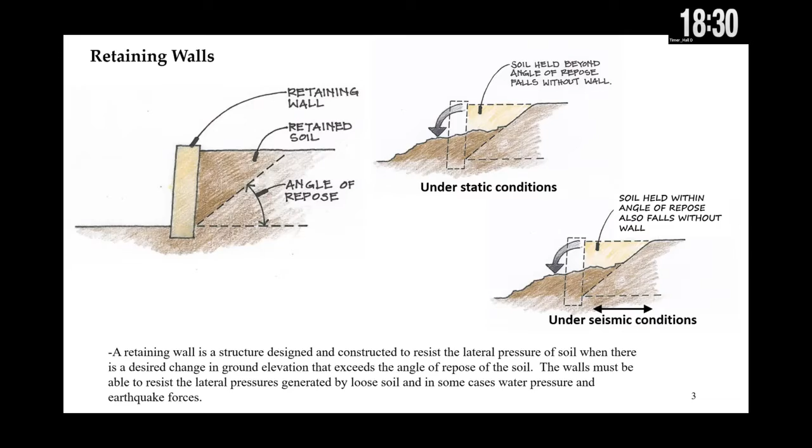Now, coming to the static forces acting on a retaining wall, I'll show you a very simple example of a retaining wall with different kinds of forces acting on it. One of the major forces is soil pressure. The soil being retained by the wall tries to push the facing of the wall, and because of that you have lateral earth pressure acting.

Typically, as per Rankine's theory, we assume the distribution of this pressure to be triangular. If you want to find the resultant force acting on the wall due to soil pressure, you take the area of this triangle, half of base into height, and it acts at a height of h/3 from the base. If you have some surcharge acting on the retaining wall, the resultant will be a rectangular distribution with a magnitude equal to the coefficient of earth pressure into the amount of uniform surcharge pressure.

This is equal at all elevations, and the area of this rectangle gives you the resultant thrust due to the surcharge pressure. And if you have live loads acting on the retaining wall, then you need to assume the Boussinesq theory.

Westergaard's stress distribution theories are there. We derive the earth pressure distributions below the live loads, and we compute the resultant thrust due to these live loads. Then you calculate the total pressure as a combination of all these pressures.

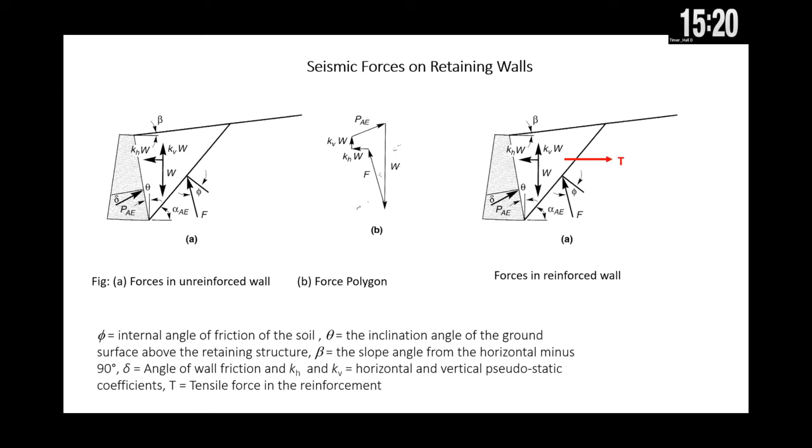You should find a mechanism by which you need to hold this wall back. This is possible if you can include some tensile elements into the retaining wall in the form of reinforcement. If you have layers of reinforcement embedded into the backfill, you can compute the total tensile force, which will actually try to push the retaining wall back into its original position. So this is where reinforcement comes into picture for the seismic stability of a retaining wall.

Now, how does an earthquake force act? Earthquake force is actually an inertial force. Since any structure is usually under stable equilibrium, and then you have this earthquake force coming and shaking it at the ground level, the structure will have its own rigidity or inertia to oppose this movement. Because of this, the components of the structure are subjected to different levels of displacement. This is what we call the inertial force effect.

Now, to encounter or sustain this inertial force due to earthquake, the structure has to be as flexible as possible. If the structure is extremely rigid, it will undergo enormous amounts of displacement, whereas if it is a flexible structure, the displacements will be limited, and the structure will have the flexibility to sustain the deformations.

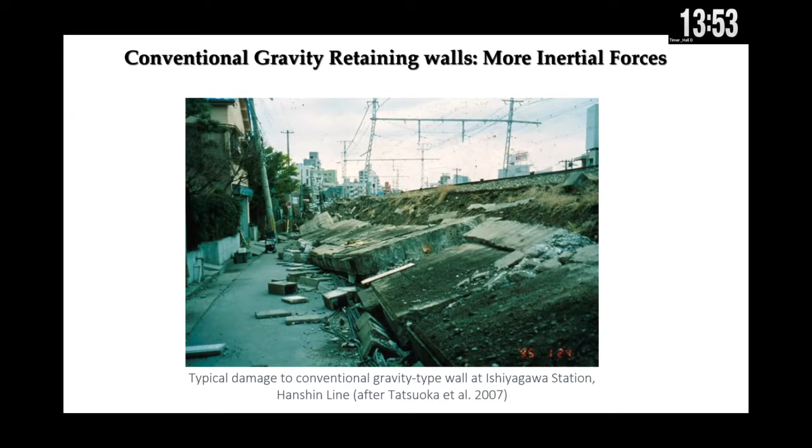Now, this is a picture of a conventional type gravity retaining wall in Japan, which was damaged severely in 1995 because of an earthquake. Conventional gravity retaining walls are extremely rigid structures, so they will not be able to displace under the influence of earthquakes. They oppose the deformations. That is why they undergo brittle kind of failure.

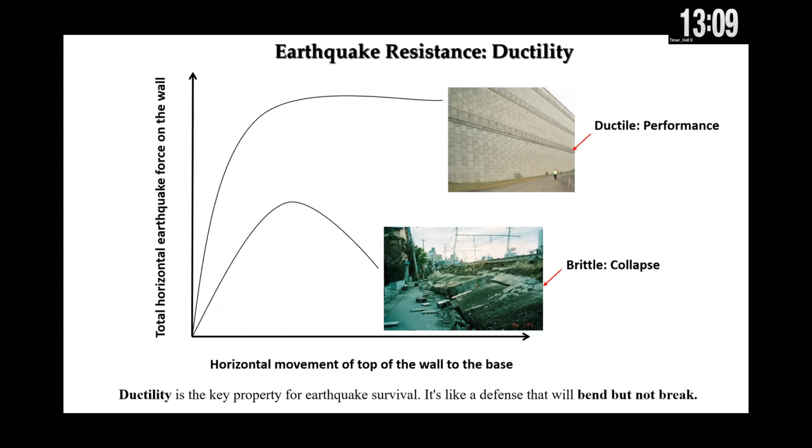So ductility is the key property for earthquake survival, and most reinforced retaining wall structures are extremely ductile compared to our conventional gravity type retaining walls.

If you take a GRS wall - short form for geosynthetic reinforced soil wall - it reacts to earthquake in a very flexible manner. This is analogous to a ship floating on a wave. In an ocean or sea, if a wave is passing and the ship is passing through a huge wave, we can think of this boat actually moving on the wave, and it moves along the wave. When the wave recedes, it comes back to its equilibrium position.

A similar thing happens in the geosynthetic reinforced soil wall. When an earthquake passes through the GRS wall, it actually flexes and undergoes deformations, but the deformations will be contained within the structure because it is an extremely flexible structure. Once the earthquake passes, it will come back to its original position.

So geosynthetic reinforced soil walls have the main advantages of improved seismic performance and ease of construction, and also a lot of savings in cost because we are using polymers instead of cement and concrete. Many recent earthquakes show that geosynthetic reinforced soil walls have performed extremely well under seismic conditions.

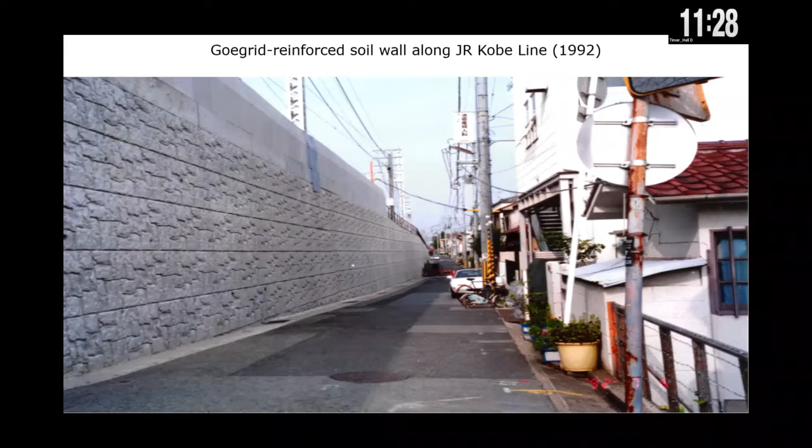One such example is in the Kobe earthquake of 1995. There is a geogrid reinforced retaining wall, shown in this picture, built for 300 meters long using geogrids, with panel facing at the front. In 1995, a devastating earthquake hit this area, and you can see that all the surrounding buildings collapsed, but the retaining wall made with geogrids was completely safe. It underwent very little damage during this earthquake.

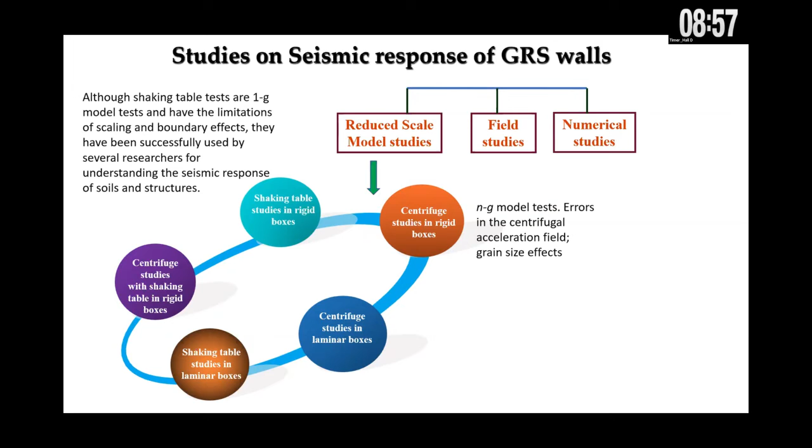All said and done, centrifuge modeling has its own advantage because you don't have to use any scaling factors like in shaking table studies.

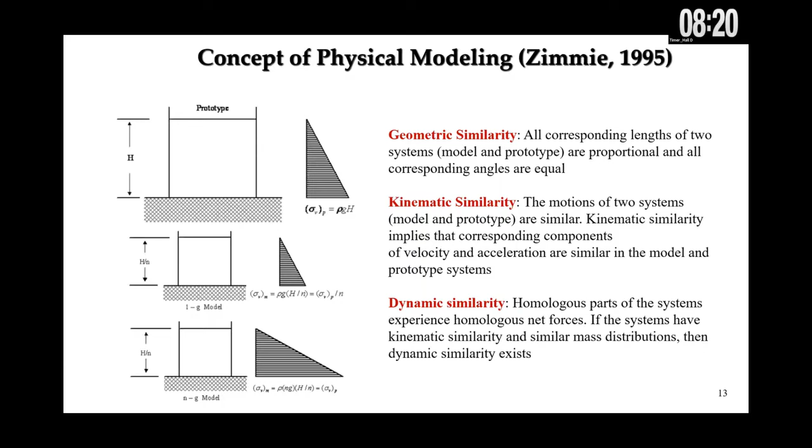The concept of physical modeling, explained by Zimmie in 1995, states that an exactly similar model is created in the lab when three conditions are satisfied. One is geometric similarity, meaning the linear dimensions are equally scaled. Kinematic similarity, in which the motions are exactly similar. Dynamic similarity, meaning homologous parts of the systems, both in model and prototype, experience homologous net forces, which is possible if you have kinematic similarity and equal similar mass distributions.

So if you have shaking table model studies, how do you create scaling laws so that the results can be extrapolated to understand the performance of actual prototype structures in the field? There is this scaling factor. A length scaling factor can be defined as the length of a linear dimension scaling factor, which is length of the model by length of the prototype. It's a very simple geometric scaling.

If you want to create a similar scaling factor for force, then you go with the dimensional parameters, like force equals gamma into V. So the force scaling factor would be gamma V of model divided by gamma into V of prototype. But gamma should be the same for model and prototype. So technically, V has dimensions of volume, which is a linear dimension cubed. So the length scaling factor should be multiplied three times on its own to get the force scaling factor. This is how you create scaling laws from the basic laws of physics and motion.

There is also a scaling law proposed by Rocha for the stress-strain response of model and prototype. Rocha created two scaling factors: alpha for stress scaling and beta for strain scaling. If you have a stress-strain response under cyclic load for model and prototype, stress in the model and strain in the model are related by alpha, stress in the model and stress in the prototype are related by alpha, and strain in the model and strain in the prototype are related by beta.

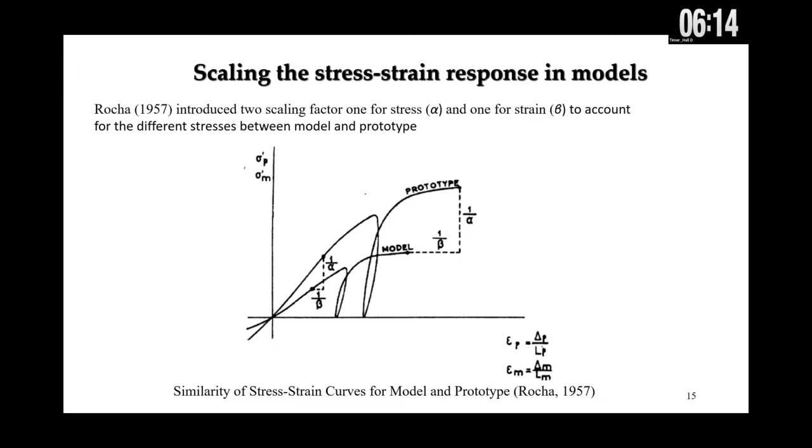But this has not become very famous because most of the times this is not such a straightforward linear difference in the scaling of stress and strain in model and prototype.

So the other theory is proposed by Scott. This is a very interesting theory based on critical state of soils. A critical state or steady state of a soil is the state in which the soil undergoes deformation at constant effective stress, constant volume, and constant shear stress. So if you have such a critical state, and if the void ratio in the model and prototype is managed so that they are at equal difference between the steady state and the current state, then they both will have the same stress strain response. This is a very interesting theory.

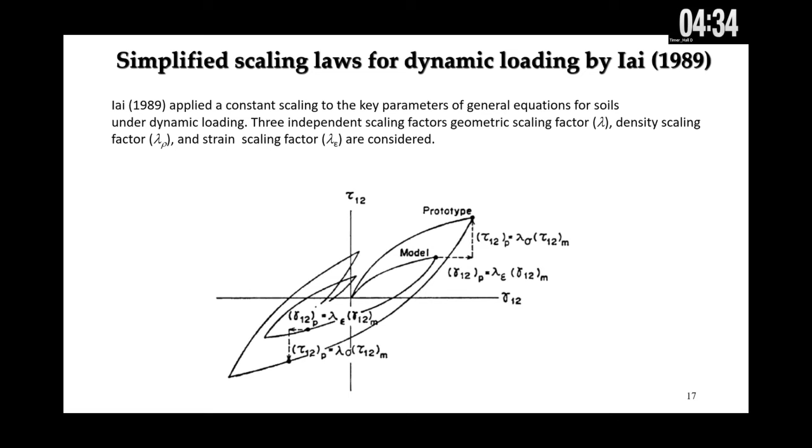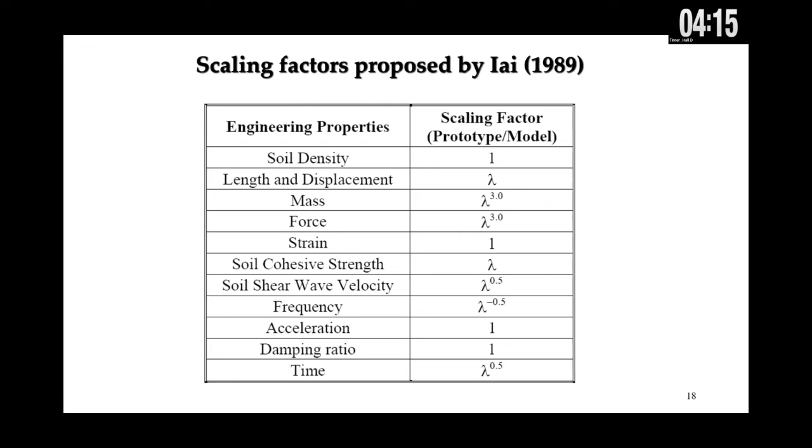The most simplified scaling laws were proposed by Iai in 1989. These are based on the hysteresis response of model and prototype, and also on basic physics and laws of motion. These are the final scaling factors proposed by Iai, where density, displacement, mass, force, strain, and all other parameters including acceleration, frequency, damping, everything in the prototype is extrapolated from the model using a scaling factor. Lambda is the linear scaling between model and prototype.

So when we are talking about reinforced retaining walls, it's also important to scale the stiffness of the reinforcement. It's not as straightforward as other parameters, because the reinforcement stiffness is governed by the strain at which we are calculating the stiffness, not by the ultimate tensile strength of the reinforcement, because the stresses within reinforced retaining walls will be very, very less compared to the ultimate tensile stress to which the reinforced band can be subjected. So we need to be very careful with the strain levels at which we are operating.

So the model scale stiffness can be obtained from the stiffness of the prototype divided by lambda square, where lambda is the linear scaling. This is proposed by El-Emam and Bathurst in 2004.

One more important thing we need to consider while doing physical modeling using a shaking table is creating a laminar container. Usually, if you carry out your model test in a rigid container, you have inherent problems, like reflection of waves at the boundaries, and side frictions which will affect your measurements of stresses, forces, and displacements. There is also resistance to the deformation of the soil, which will not be moving in its natural state inside a rigid container.

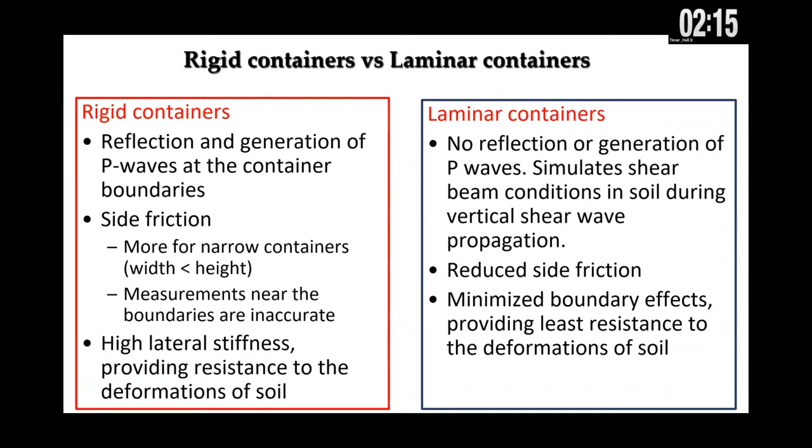To avoid these limitations, researchers have created laminar containers. These are containers in which the soil is free to move on its own accord, and the side walls will not create any friction to the movement of the soil. I will not say zero friction, but definitely it is much, much minimized compared to rigid containers, and there are also minimized boundary effects.

Another important thing is, how do you select the ground motion in a shaking table study? People use sinusoidal motion, stepped wave, and different kinds of waves. They also use actual ground motion captured from different earthquakes across the world. You can use any of these ground motions, and the most popular form is a sine sweep.

From here, I take it on to describing the ongoing research at IISc in this area.

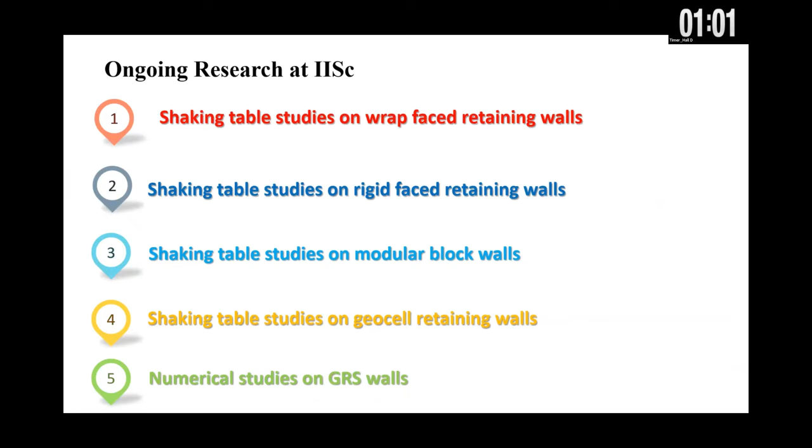We have carried out shaking table studies in our lab on different types of retaining walls, including wrap-faced, rigid-faced, modular block, geocell walls, and geosynthetic reinforced soil walls.

For completeness, I'll show you these different types of retaining walls. A wrap-faced retaining wall is one in which you do not need any additional facing. The reinforcement, either geotextile, geonet, or geogrid, is wrapped around each lift of the retaining wall, creating one complete layer. You don't need additional facing; this acts like facing plus reinforcement.

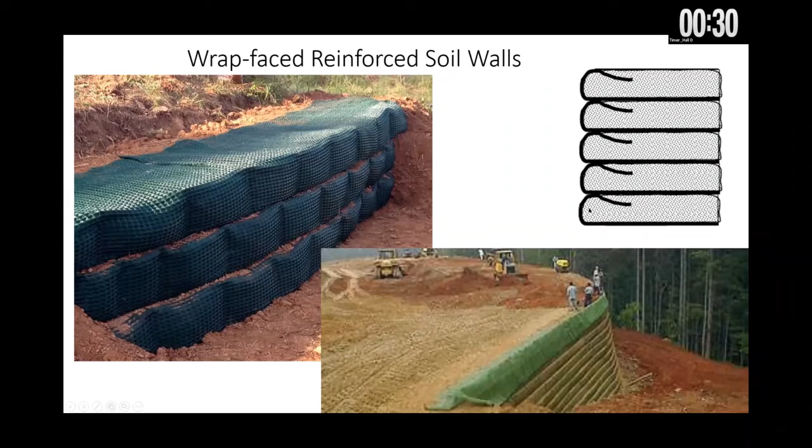A modular block wall consists of reinforcement inside and modular blocks which fit into each other because of their geometry. They don't need any additional fixtures like in other segmental panel walls. Each block sits on the subsequent layer, and the final wall is created with the facing and reinforcement like this.

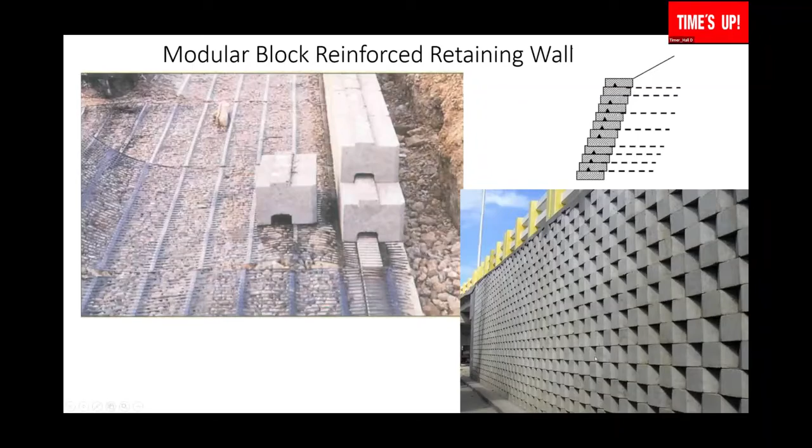A geocell retaining wall is made up of geocell facing, where you have layers of geocell spread and filled with soil, and then retained backfill. The facing has this stack of geocells, creating the entire facing for the wall. It also has the advantage that you can grow vegetation on these pockets of geocells, so you can cover this entire area and also provide additional reinforcement through the roots of this vegetation.

Coming to our shaking table, it's a 1 meter by 1 meter shaking table, which can hold a load of 1 ton and has a frequency range of 0.05 hertz to 50 hertz. You can test up to 2G accelerations, and the amplitude is plus or minus 200 millimeters.

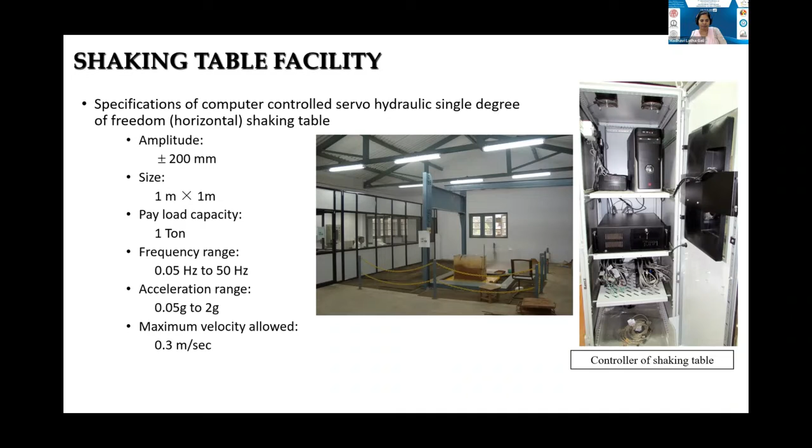We also have a laminar box design for this shaking table, which has rectangular stacks of hollow aluminum panels that are very low weight. Between each of these stacked panels, you have roller bearings on which the panels can freely move, and a frame outside contains this entire assembly, which is fixed to the base of the shaking table top.

Since you have these roller bearings, the motion of these panels with respect to each other is very smooth. The soil inside the retaining wall, inside this laminar box, moves in a free manner compared to a rigid retaining wall. It is a one-dimensional shaking table, or one degree of freedom, so it can only move in the horizontal direction.

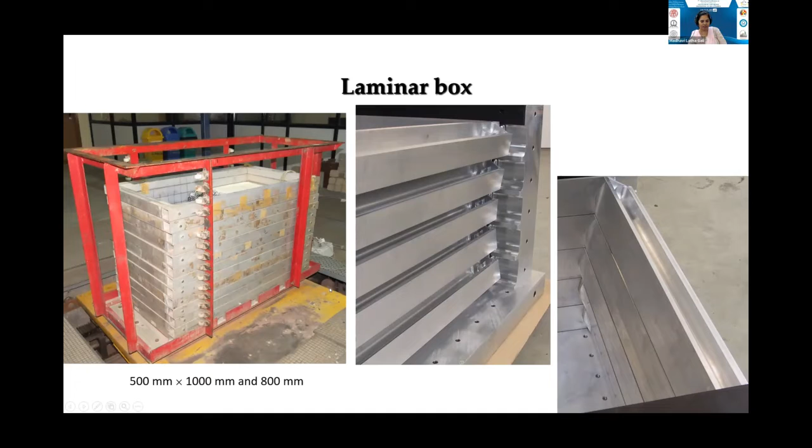There is some instrumentation we are using, like accelerometers, pressure sensors, and strain gauges. These are all very common types, but the very interesting instrumentation we are using is ultrasonic displacement sensors. These do not touch the model but are at a distance from it. They send ultrasonic sound pulses which touch the moving object and come back in reflection, and based on the arrival time, you can find the distance between the sensor and the moving object. In a second, you can take about 100 measurements of the deformations of the wall, which is very important in dynamic testing and shaking table studies.

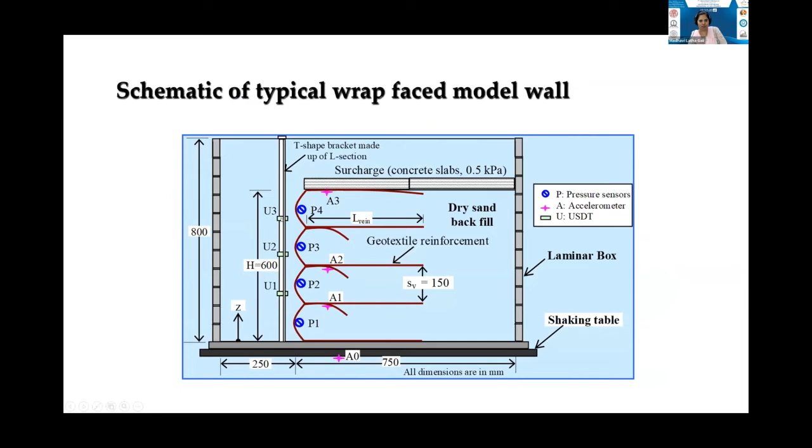This is a schematic diagram of the wrap-faced model wall we have created. You have these stacks, as I already explained, and pressure sensors measuring the pressure inside the wall, and accelerometers A1, A2, A3, where you measure the amplification of acceleration at different levels, plus ultrasonic displacement sensors placed away from the facing.

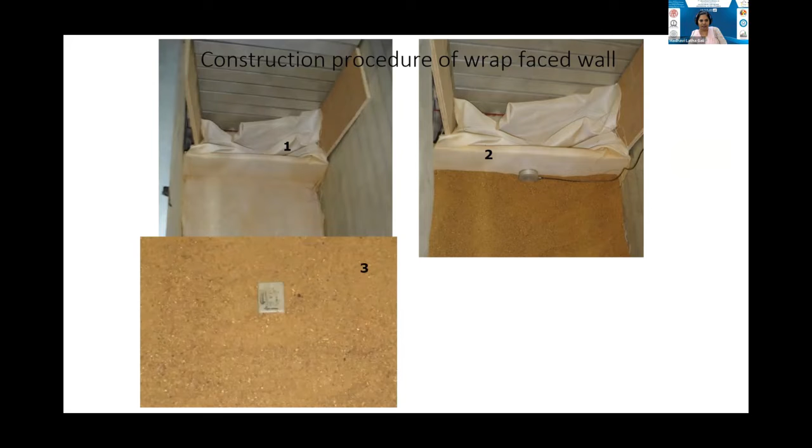The procedure is very simple. For construction, I'm showing you some pictures: woven geotextile is used for reinforcement. You keep one layer of this geotextile, and on top you fill sand up to the height of one lift, and embed your pressure sensors. Here you see a pressure sensor at the required elevation, and an accelerometer, also embedded inside the soil. Then you finish one layer and wrap it around carefully, the textile wrapped around the soil to a certain length.

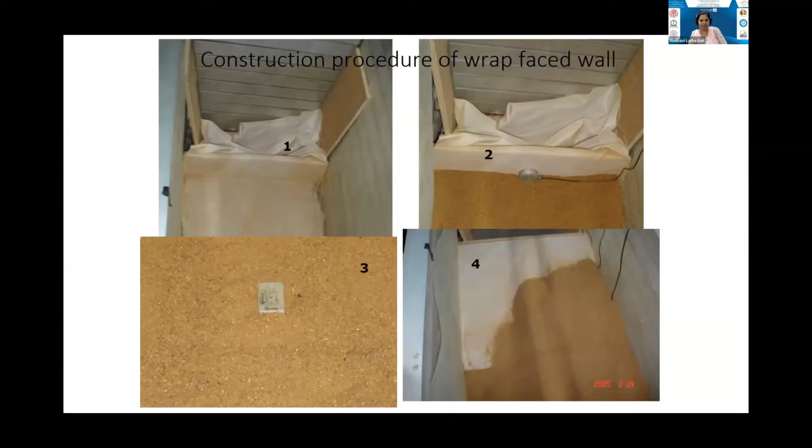Sand pluviation technique is used to fill the soil so that you get uniform relative density within the model. This is a finished wrap-faced model. The yellow ones you see here are the ultrasonic displacement sensors.

Some results, I'm not going into the details, but you can see the effect of relative density. As you increase the relative density from 37% to 87%, the horizontal displacement of the wall comes down from 50 millimeters to almost 5-6 millimeters.

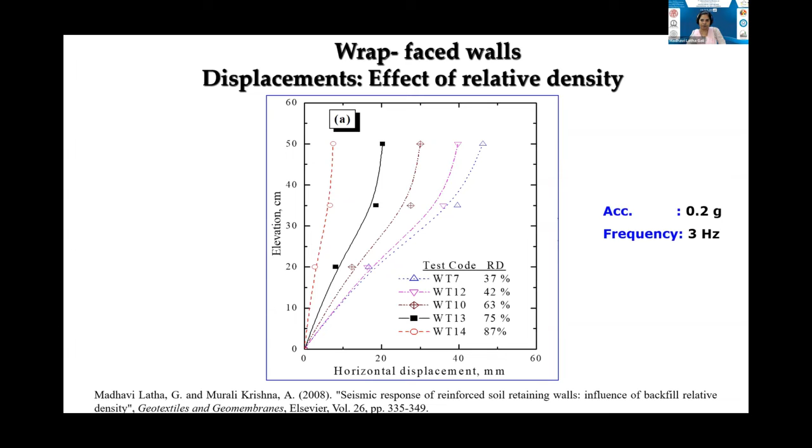This test is carried out at a very high earthquake scenario, where the frequency is 3 hertz and acceleration is 0.2 g.

To simplify the presentation of acceleration amplifications, we have used the RMS amplification factor. This is root mean square acceleration, a very simple parameter. You have a number of cycles in which you are measuring the acceleration, and you have positive and negative accelerations.

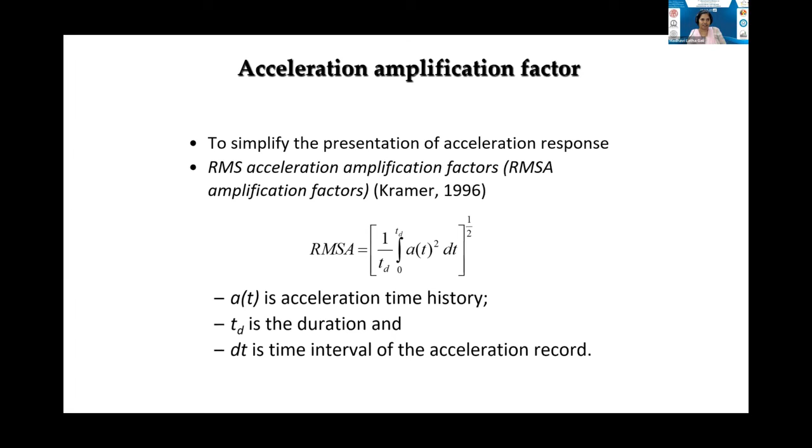To average out the acceleration for the overall test at any elevation, you take the square of the acceleration and integrate it over the entire duration. This gives you the mean square acceleration by dividing by the total duration. Then you take a root, since you squared it, to get the absolute value of average acceleration, which represents the average acceleration to which the model is subjected.

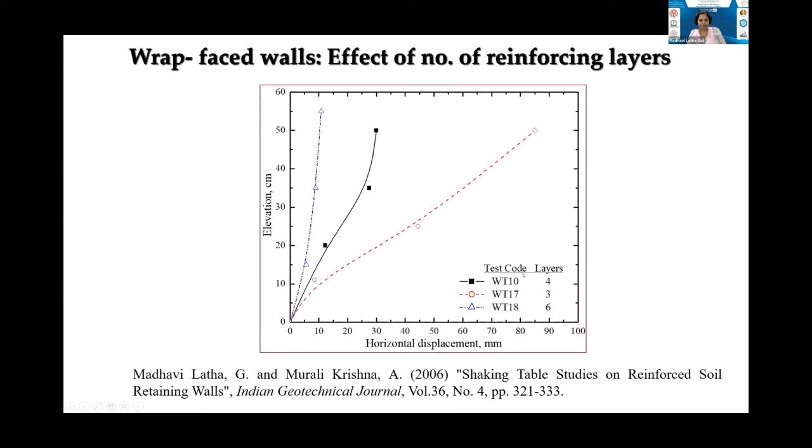When designing a reinforced retaining wall, the general guideline is that the reinforcement length should be 0.7 times the height, so as to avoid pull-out failure. But under seismic conditions, the 0.7 parameter will not work. This is what's shown in this plot.

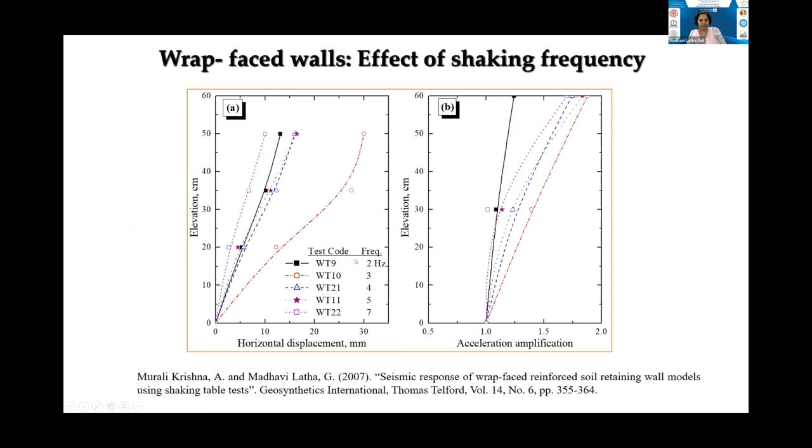This picture shows the effect of frequency, with different frequency values, on how accelerations and displacements vary. The other set of model tests are on rigid faced walls.

Here, instead of a wrap, we have a rigid wall. I will show you a photograph which makes it more clear. You have stacks of steel panels which are rectangular and hollow, stacked inside steel guide rods, into which they are pushed, so that you create a full height rigid wall which is extremely rigid and not flexible at all.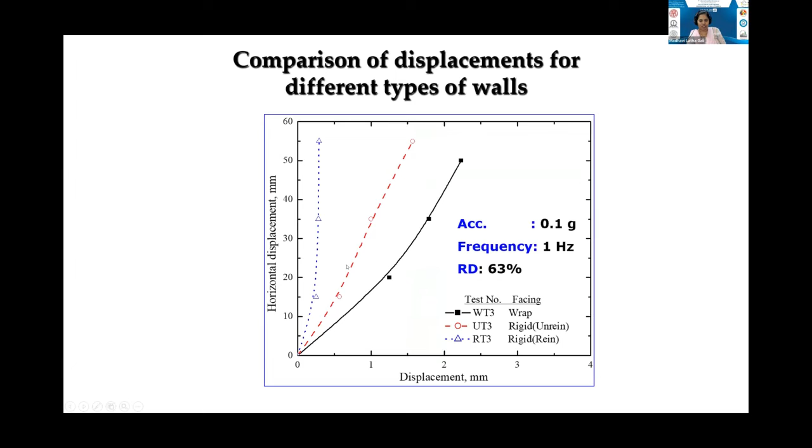Comparing the displacements of different types of walls - wrap faced, rigid faced, and rigid reinforced - rigid faced reinforced retaining walls perform much better in seismic performance because the displacements are much lower, almost insignificant.

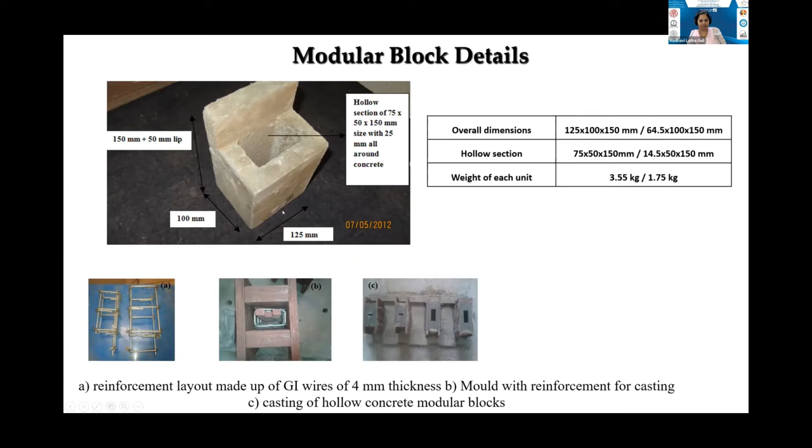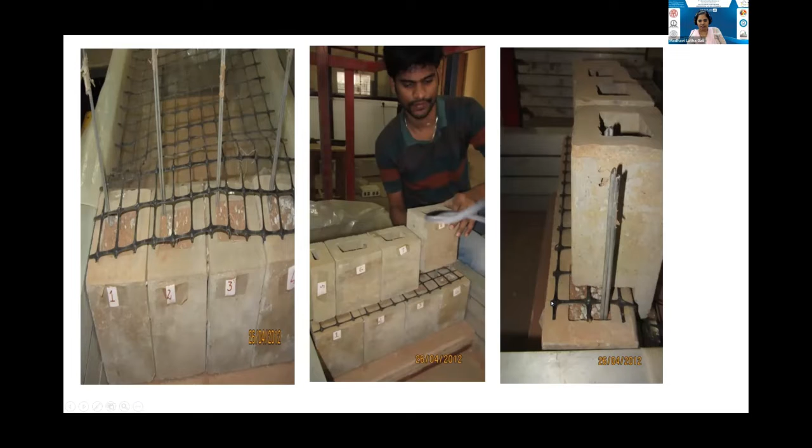You can see there is a lip here, which allows for easy fitting of successive modular concrete blocks one onto the other, so that you create a facing for it. You can read about the details of how to create these modular blocks and retaining wall in our papers if you want more details. GeoGrid is used as reinforcement, and this is a finished retaining wall.

Professor Lata, sorry to interrupt - can you please finish in 5 minutes? Is it possible? Sure, okay, thank you, definitely.

So the next set of tests are on geocell retaining walls. As I already explained, these geocell layers are used as facing and filled with soil. The advantage of geocell reinforcement is that it not only provides additional benefits through friction interlocking, but also provides all-round confinement, membrane effect, and anchorage effect because of its geometry.

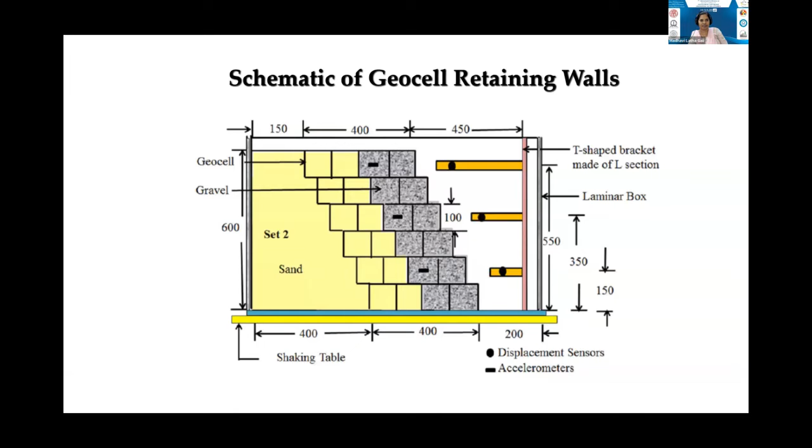The soil within the geocell is always in a state of all-round confinement, so that the entire facing of the retaining wall is in a state of confining stress all the time, which opposes any lateral forces acting on the facing.

These are models of retaining walls created using GeoNet - a very weak material, you can pull it apart using your hand. These retaining walls are constructed with very weak reinforcement so that you can actually use the scaling appropriate for reinforcement stiffness.

One interesting result: with rigid facing, the retaining wall displacement increases continuously with wall height, whereas with geocell facing, the reinforcement allows for adjustment of displacement at every elevation, so that the final displacement at any level is much, much less compared to a rigid faced wall.

It also has an enhanced base width and a set-off when constructing it, giving additional geometric advantage to the retaining wall, providing resistance against sliding and overturning.

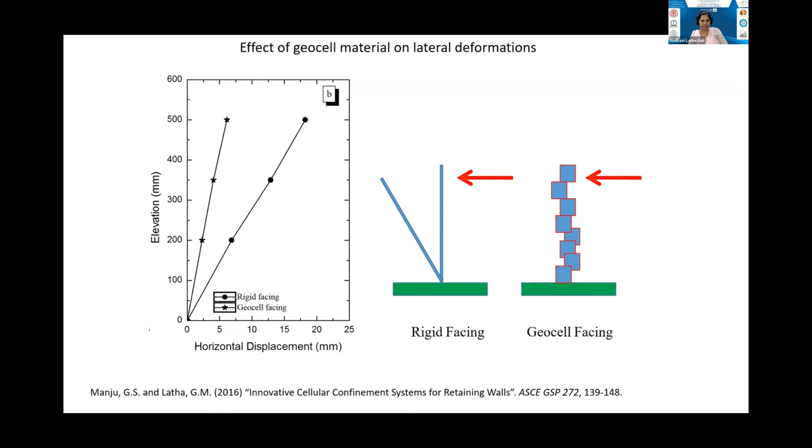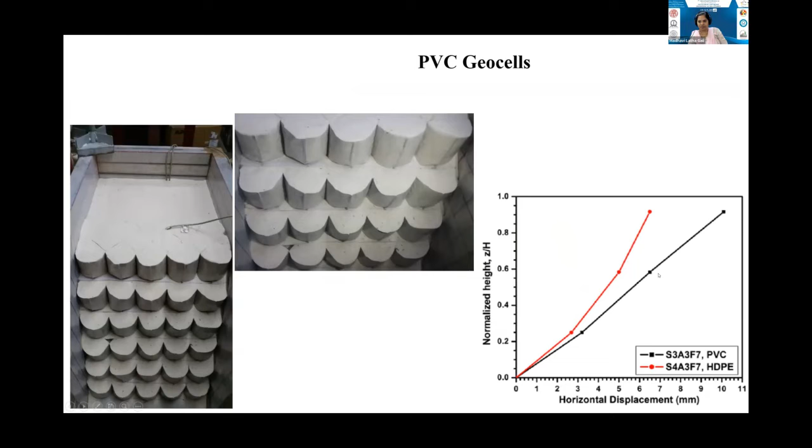We've also created geocells using PVC, which is a very, very weak material - the normal PVC material we use as overhead projector slides, using a photolamination technique to make these geocells. You can see a comparison of performance between PVC and high density polyethylene geocells.

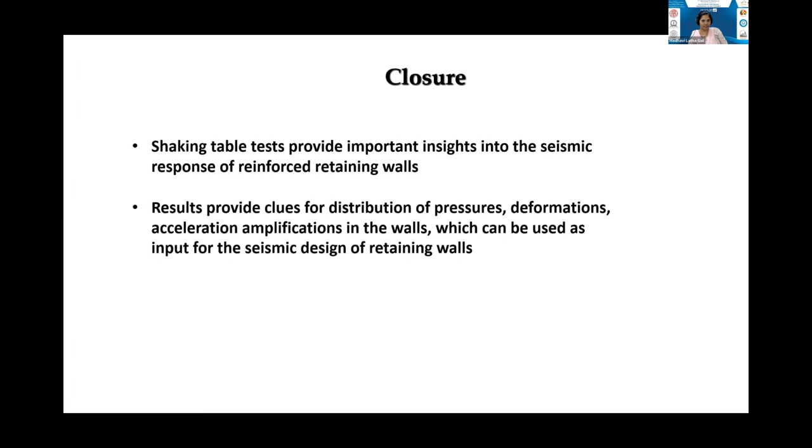As a closing statement, I would like to say that shaking table tests provide important insights into the seismic response of reinforced retaining walls. They are not foolproof. You need to be extremely careful with your scaling, quality control, and the materials you are using, their properties and everything. When you do a perfect test, the results provide important clues for understanding the pressure distribution and deformation. But at the same time, as a disclaimer, you cannot directly extrapolate the results of shaking table tests to the seismic response of actual structures in the field. You have to be very careful when using these results.

All credits go to my students: my first PhD student, Murali Krishna, who is a professor at IIT Tirupati now, and Santana Kumar, my MTech student, and Manju, another PhD student of mine. Thank you so much.

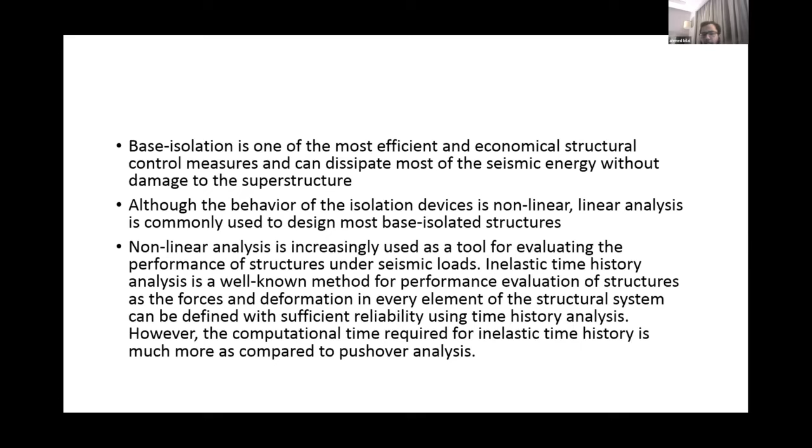Base isolation is one of the most efficient and economical structural control measures. It dissipates seismic energy without damage to the superstructure. Although the behavior of isolation devices is nonlinear, linear analysis is commonly used to design most base isolated structures. In this study, the base isolators designed are lead laminated rubber bearings, designed as per the procedure given in the book written by T.K. Datta sir for multi-storied buildings. The performance of the structure was checked for different numbers of isolators using linear analysis and nonlinear pushover analysis, and the optimum number was found based on the least cost of base isolators.

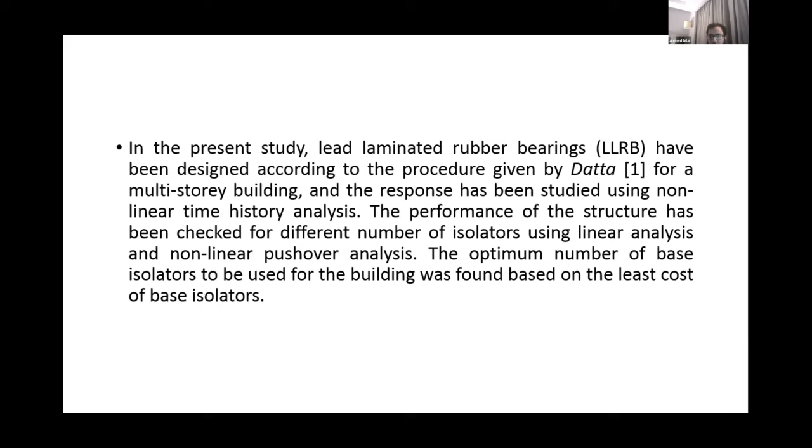This is the structure that we have taken, using M25 grade concrete and Fe415 grade steel. This structure lies in seismic zone 4. We modeled it using SAP2000, with beams and columns modeled using frame elements, while the base isolators were modeled using nonlinear link elements. Nonlinear time history analysis was performed to compare the response of the fixed base building and the base isolated building, using the El Centro time history, scaled for PGA to 0.25g. This building has 20 columns.

We can see that there are 20 columns. So in this approach to optimize the cost, we have reduced the number of base isolators used, gradually reducing 2 at a time from below the columns. This process was continued until, when we reduced any further number of isolators, the structure became unstable.

So when we reduced the isolators from beneath a few columns, we had to provide a thick base slab beneath, so that the base remains rigid even if fewer isolators were used. We then performed linear as well as non-linear analysis for each case to ensure the performance of the structure has not been compromised by reducing the number of isolators.

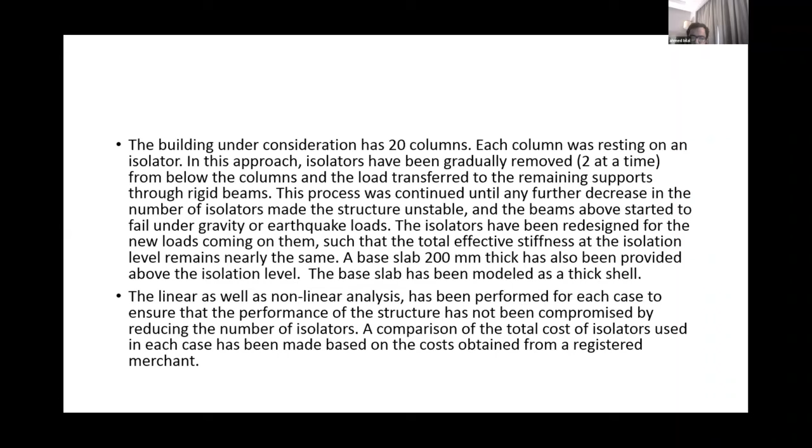The base shear has been compared for fixed base building and base isolated building. Then we compared the plinth level acceleration as well. Plinth level displacement can also be compared, because when the building is fixed, we don't have substantial plinth level displacement, but when we use base isolators, the plinth level displacements increase. Top story acceleration has also been compared, and we can see that it was much more when the building was fixed.

The top story displacements have also been compared, and here we can see that they are comparable. The total displacements at the top story for fixed base building and base isolated buildings are approximately the same, with no much difference. That is because in base isolated building the story shear reduces, or the inter-story drift reduces, so the total displacement at the top may remain the same.

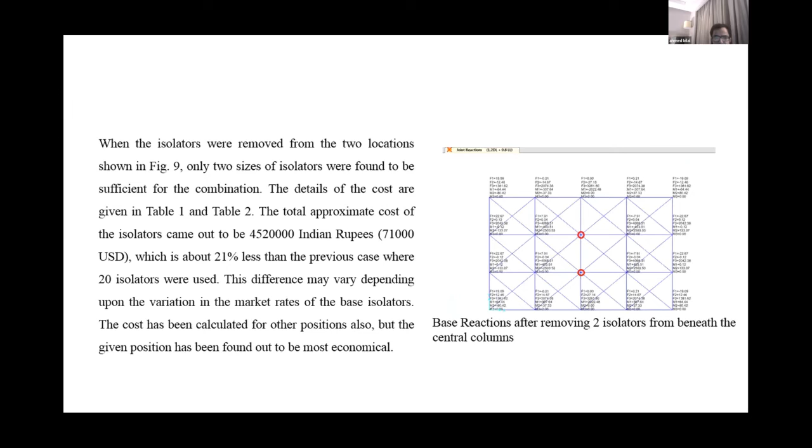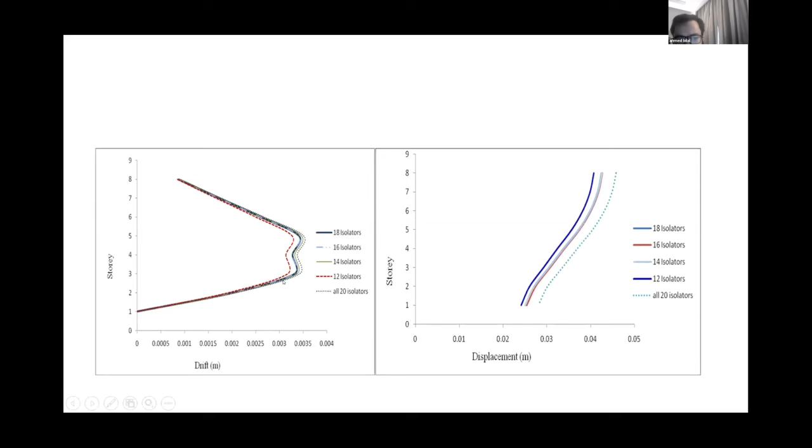Nonlinear analysis as well as linear analysis was performed for each case, so that we can ensure that when we are reducing the number of isolators, we are not compromising with the performance of the structure. We can see that the performance remains nearly the same even when we reduce the base isolators. The story drift has been shown in the first figure, and displacement for each case has been shown in the second figure.

Also, the cost can be reduced substantially. We can also perform much more rigorous analysis, including reinforcement cost, installation cost, etc., so that we get the exact estimate of the savings.

So now here I would conclude that the results of nonlinear time history analysis show that the base shear of the building has reduced by 54% on using base isolators, and consequently the forces in the members of the building were also reduced. Thus, it can be said that base isolation should be used in buildings instead of conventional earthquake resistant design for higher performance levels like life safety and immediate occupancy.

A cost-effective approach of designing the base isolation system has been presented here, in which the number of base isolators has been optimized to get the most optimal combination of base isolators.

It is a general practice to use base isolators beneath every column of a building, but it has been shown in the present paper that the same level of performance can be achieved using a lesser number of base isolators if they are appropriately designed. The results of the linear and nonlinear analysis have been presented in the paper to support this inference. Thus, it can be concluded that for designing a base isolation system for any building, an optimization study should be conducted to know the combination which gives the least cost.

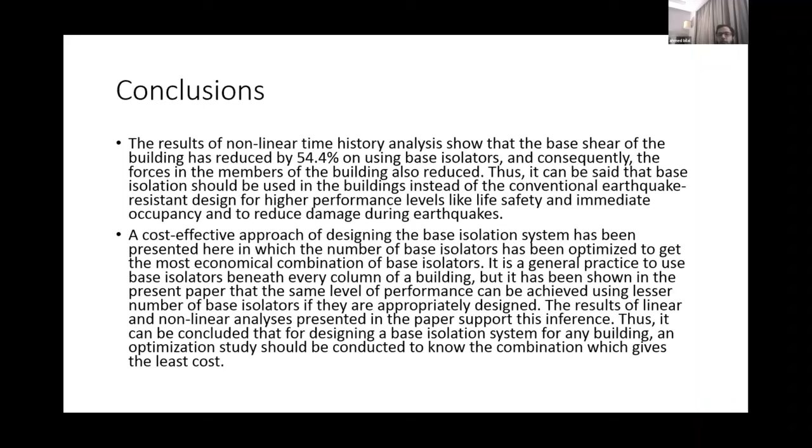So these are some of the references.

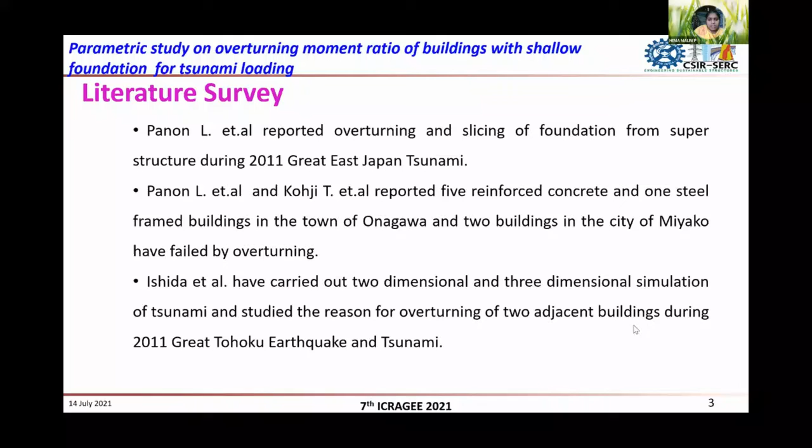From this, we have identified three major parameters. Also, Panon and Kohji reported 5 reinforced concrete buildings and 1 steel framed building in the town of Onagawa getting overturned. These studies have been read, and this literature has been taken for the study.

Then coming to overturning, how does overturning of a building happen? Overturning of a building is due to the instantaneous action of hydrodynamic and buoyancy forces. Since tsunami is an instantaneous action of forces, it hits the building and the building gets overturned. So the overturning moment is mainly caused due to buoyancy forces and hydrodynamic forces.

Coming to hydrodynamic force, it is a dynamic force, and also a lateral force acting on the building in the horizontal direction. It tends to overturn the building in the horizontal direction. Then coming to buoyancy force, it is an uplift vertical force acting under the foundation. This force acts through the center of gravity of the building, and also has a tendency to cause overturning.

These forces together act and cause overturning of a building. Coming to resisting moment, the resisting moment is only the self weight of the building. Since there is no loading on the structure, only the self weight of the building is taken as a resisting moment.

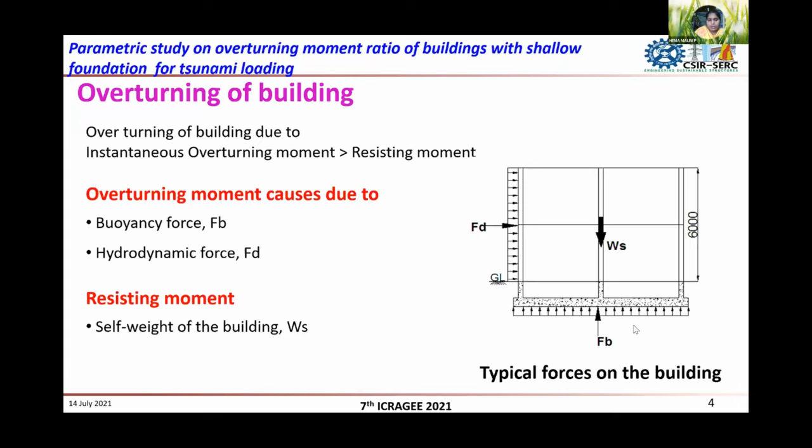This figure shows typical forces acting on the building. For this study, we have considered tsunami force from FEMA 646/2012. This is a guideline for the design of a structure for vertical evacuation from tsunami.

This FEMA code considered many forces for tsunami, like hydrostatic loading, debris loading, buoyancy forces, and uplift forces, and hydrodynamic and buoyancy forces. Among these forces, the major ones causing overturning are hydrodynamic and buoyancy forces.

Coming to overturning and resisting moment: the overturning moment is due to hydrodynamic and buoyancy forces, and the resisting moment is due to only the self weight of the building. From this we calculated the overturning ratio of a building, plotted graphs, and carried out a parametric study.

Coming to the parametric study, we identified 3 parameters as a cause for overturning of a building. The first one is the residual air space ratio, the next one is the inundation depth, then height of the building. These are the major 3 parameters influencing the overturning of a building.

This figure shows the typical plan considered for our controlled study for this parametric study, and the plan considered is 8 meter by 8 meter. 5 RC buildings have been considered with respect to 1 to 5 stories, and each story height is taken as 3 meters.

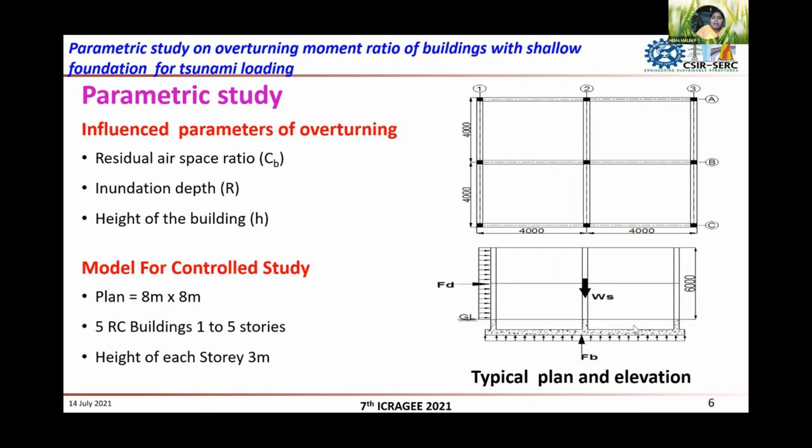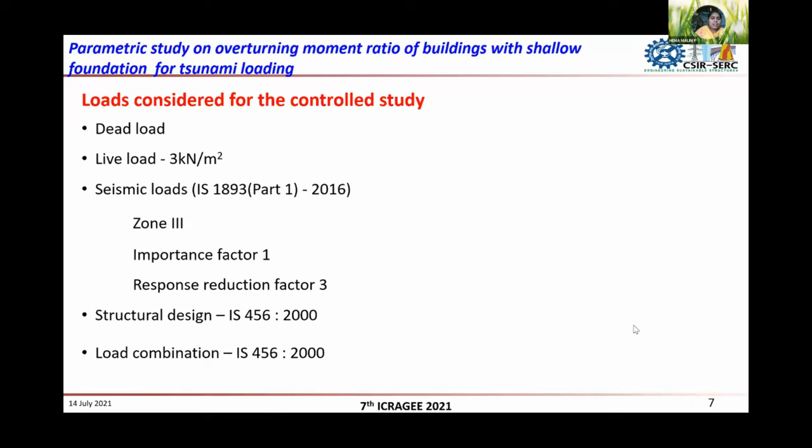For this plan, we have carried out the structural analysis of the building with seismic loads. The loads considered for the controlled study are from IS 1893 (Part 1) 2016. We consider this building located in Zone 3, with a seismic zone factor of 0.16. Since it is a residential building, the importance factor has been taken as 1 and response reduction factor as 3. Structural design and load combination are as per IS 456/2000.

For all the buildings, we took the thickness of the slab as 125 mm, and since we carried out the study for a shallow foundation, we considered a raft foundation. For different stories of a building, the thickness of the foundation will vary accordingly.

With these dimensions and influenced parameters, we calculated the overturning ratio and compared it with the influenced parameters. The following studies have been carried out. So we are going to see about the influenced parameters. The first one is the residual air space ratio, and how this parameter is going to affect the overturning of a building.

In this parameter, Cb equal to 1 means there is no water entering into the building, so we consider it like an empty box. When Cb equal to 0, these two are the extreme cases. Within that, we have considered 0.2, 0.4, 0.8, and so on. With these parameters, we are going to see how the overturning of a building varies.

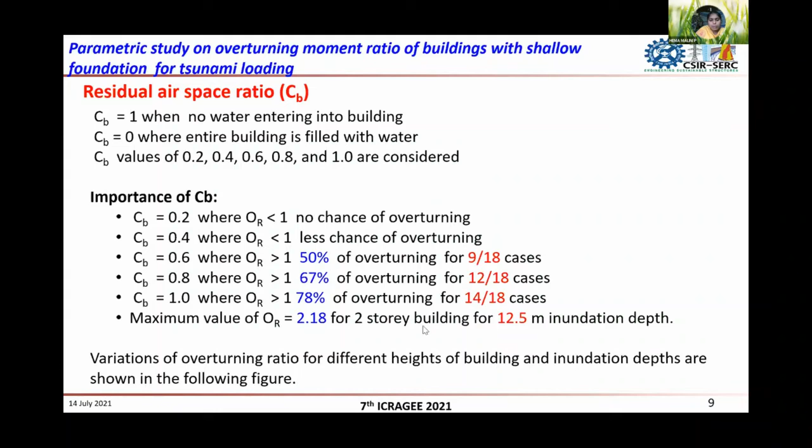Next, the parameter we're going to see is inundation depth. In this study, we considered 4 inundation depths. Indentation depth means the height of the tsunami wave that hits the building. So we take typical inundation depths for this study: 5 meters, 7.5 meters, 10 meters, and 12.5 meters are considered.

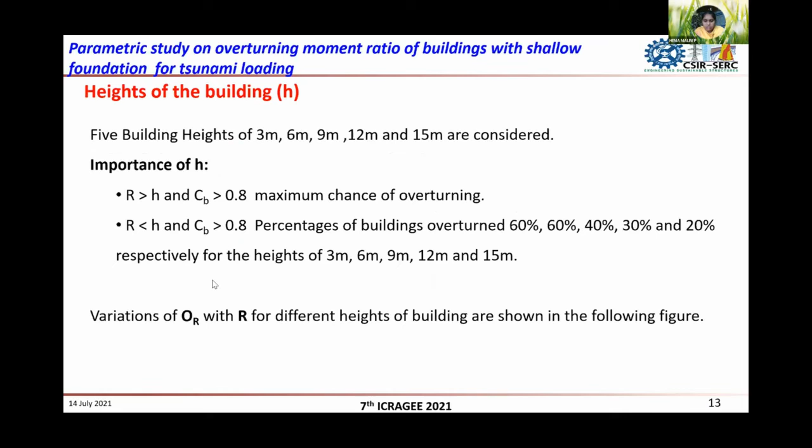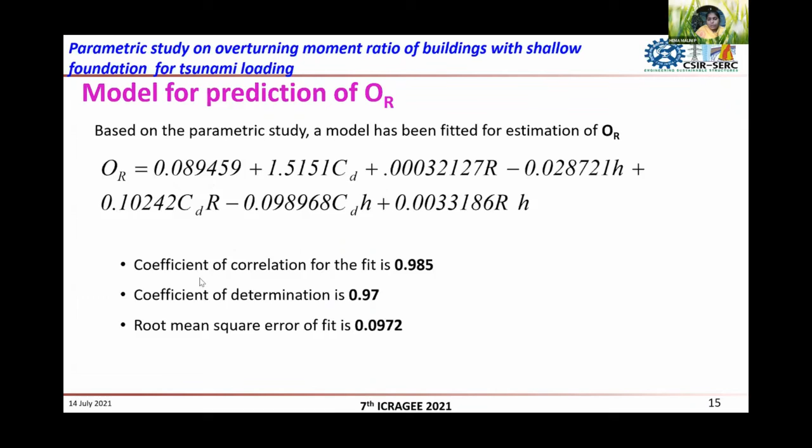From this parametric study, a model has been fitted for estimation of overturning ratio. We have taken coefficient of correlation of the fit as 0.985 and coefficient of determination as 0.97. Root mean square error of fit is 0.0972. So this is the validation of the model proposed for OR.

So from the study, I'm going to conclude this. The variation of overturning ratio of a building - for this, identified parameters are studied. Based on this, we have proposed one model. This model has been used for preliminary evaluation of overturning ratio of building. Thank you.

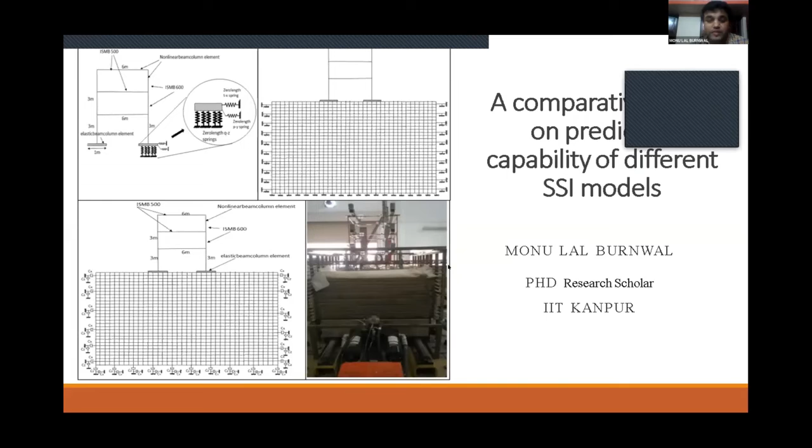This is Monu Lal Burnwal, and my topic of presentation is a comparative study on predictive capability of different SSI models. As you know, everything you do in experiment has to be simulated well, and there are different approaches to simulate it.

There are different approaches to simulate it. In SSI we will be considering a continuum model or a discrete Winkler based model.

With earthquakes, there are many building damages induced, and you can see in the past also every earthquake has several SSI effect damages which can be seen. These earthquake-induced ground shaking affects the shallow foundation, and this leads to different types of failure.

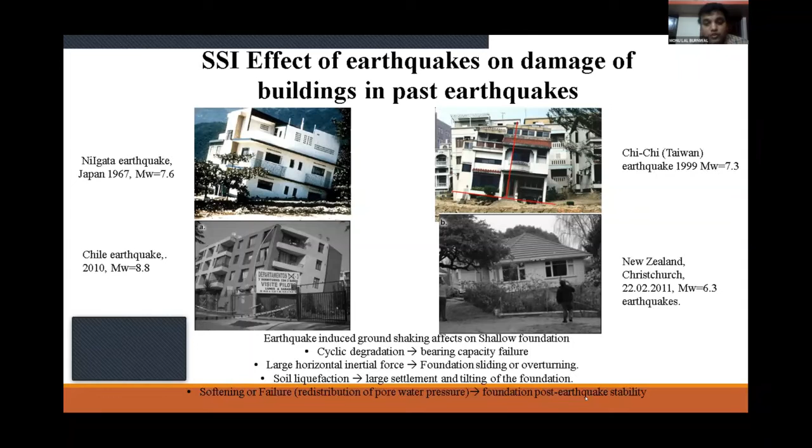The cyclic degradation of the soil leads to bearing capacity failure of the foundation. Larger horizontal force initiated by the earthquake leads to foundation sliding or overturning of the building. Soil liquefaction can result in large settlement or tilting of the building, while softening failure can lead to foundation stepping. These are some pictures from the ground failure during the Kocaeli earthquake in 1999.

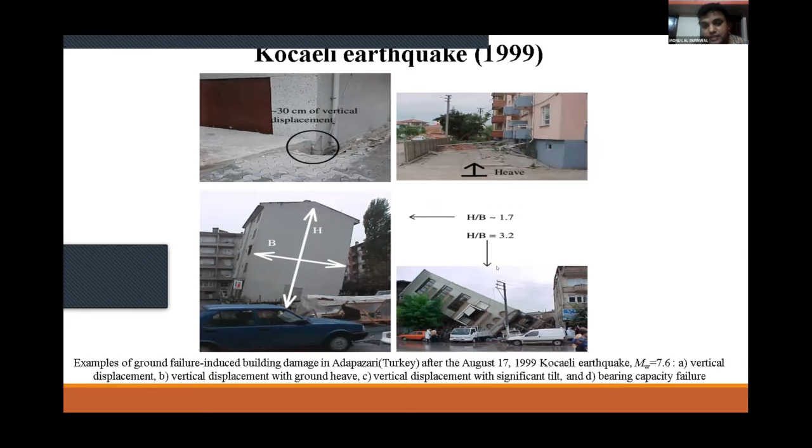You can see the settlement - there is heave on the ground, the ground is lifted up, or the building is tilted. That depends on the H by B ratio of the building.

So these have to be studied and modeled efficiently, and soil structure interaction is needed.

To study the soil structure interaction, it mainly has two aspects: inertial interaction, which takes into account the effect of flexibility and energy dissipation of the supporting medium on the system responses. It mainly deals with the period, mode shapes, and damping properties of the system.

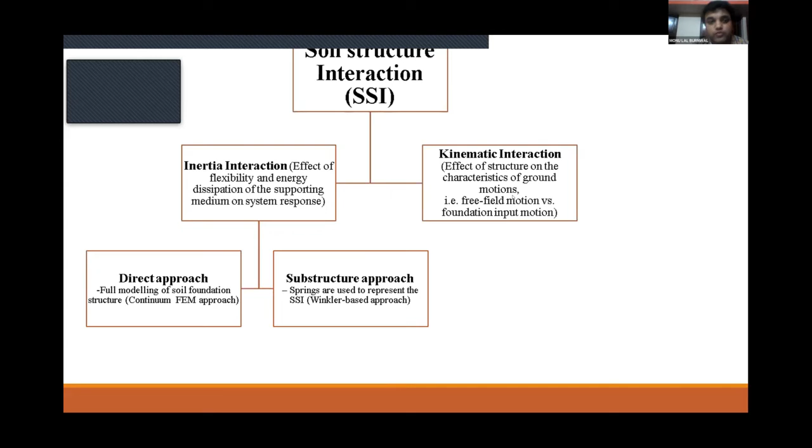While kinematic interaction deals with the effect of structure on the characteristics of the ground motion, that is the free-field motion or the foundation input motion. A free-field motion is a motion where there is no structure - the wave propagates to the ground surface, and whatever effects it has on the ground surface is called free-field motion.

While the foundation input motion also involves the foundation - how the structures behave with the wave, what are the characteristics of the ground motion, how it changes - that is simulated with kinematic interaction.

Mainly settlement, sway, sliding behavior can be modeled with two approaches: direct approach, that is full modeling of the soil-foundation-structure system as a continuum FEM approach, or a substructure approach where we transfer the wave to the soil surface and then model it with springs. Springs are used to represent this, modeled with a Winkler based approach.

There are many uncertainties while modeling. Generally the soil structure modeling uncertainty includes modeling with the geometry, element type, mesh type. The choice of material model requires skills and literature to judge the analysis type and loading condition.

So while you build a model, you need to select the model properties, material models, interface properties, use of free-field boundary conditions that can be simulated as fixed, discrete, Winkler, reflective, or viscous based boundary conditions. There are many boundary conditions which can be simulated, and it depends on the type of model being analyzed. Different approaches are used to solve the problem, like macroelement model, discrete model, or continuum for different base boundary conditions.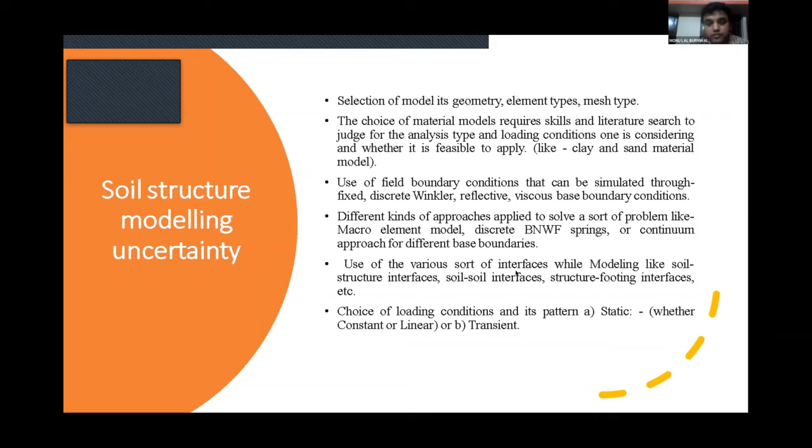Choice of loading conditions matters too - whether static, how the loads are applied, whether it is constant load or linear load, and how it is to be analyzed. In dynamic analysis we also see the transient wave loads being introduced.

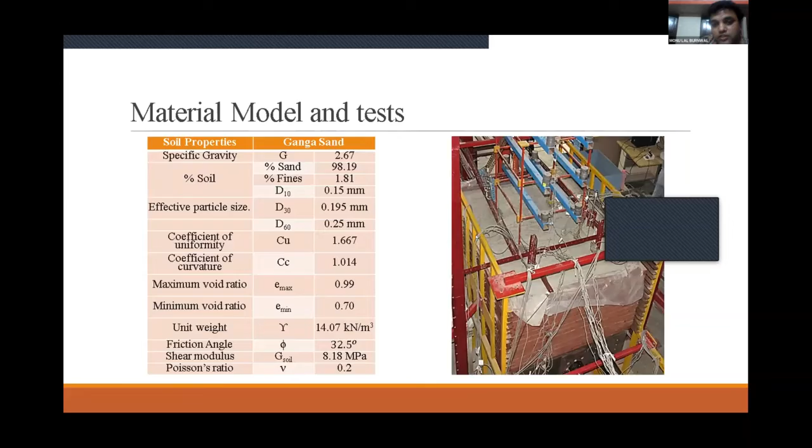For discrete based models, we generally use springs, in terms of py, qz, and tz, where py defines the passive resistance of the footing against the soil, tz represents the frictional contact between the soil and the footing, while qz represents the bearing capacity of the footing.

The second approach we have used is a continuum viscous model or continuum rigid model. These are continuum models, where we model the soil as a continuum quad element model with pressure dependent multi-yield, which is available in OpenSees. All these models have been done in OpenSees.

This is a framework, a 2D framework, which comprises a 2D FEM framework, where you have the flexibility of simulating a model in your own terms. So the model is again simulated here with equal degree of freedom.

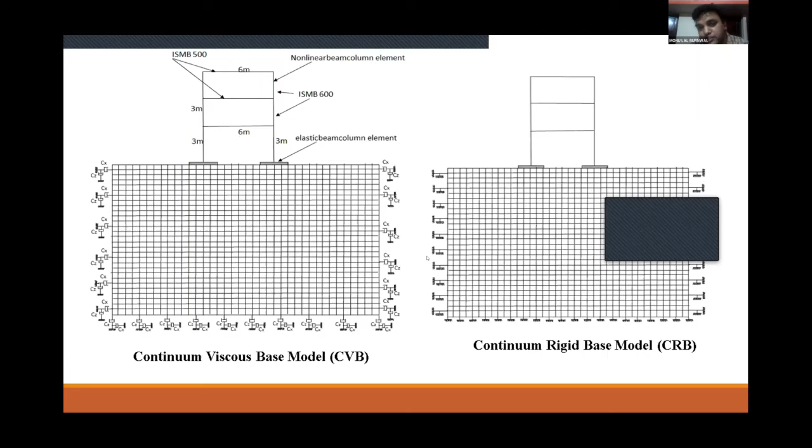A stage analysis procedure is developed, and with this stage analysis, firstly a soil domain, soil profile height, soil constitutive model parameters, and weight of the soil are defined.

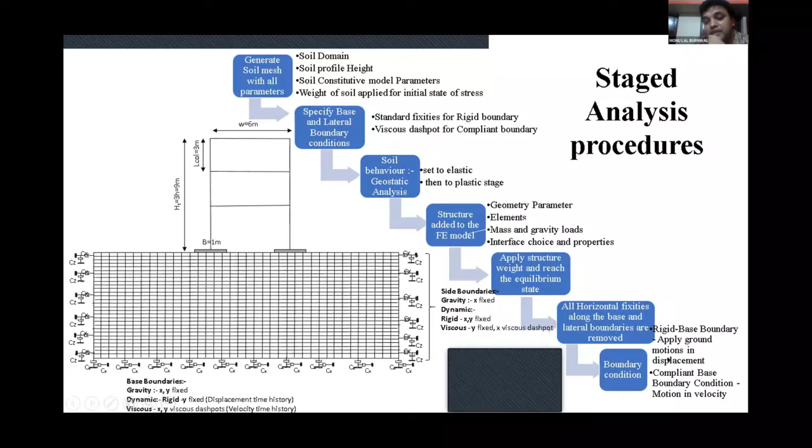That's fine, okay. So a mesh is defined, then the boundary condition, then the fixity, and then the structure is put in place. Applying a structure weight and vertical stage analysis is done. Then all these boundary fixities are removed, and the viscous dashpot or fixed boundary conditions are applied for rigid base or the compliant base. In rigid base we apply the motion in terms of displacement, while in compliant base we apply the motion in terms of velocity.

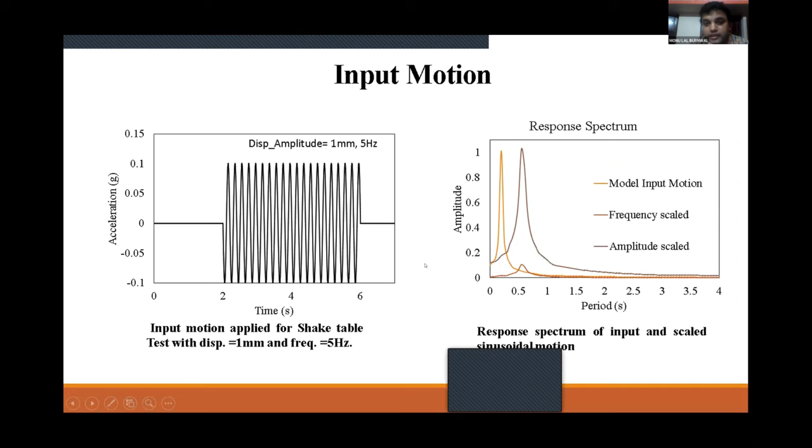So this was the input motion which I used, and it was frequency scaled and amplitude scaled to provide to get into the prototype.

I found that eigenvalue analysis compared with the shake table analysis showed almost a 6.7% increase for discrete Winkler, while continuum was 12%.

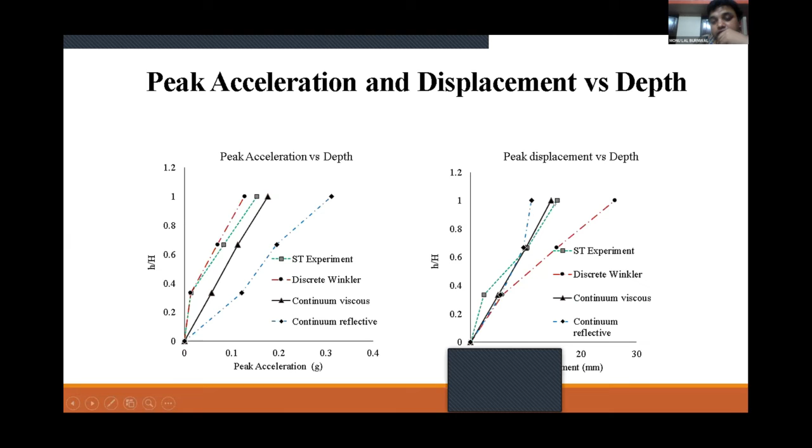I believe there was trapping of waves, and that's why this leads to this large movement. So these were the conclusions.

Eigenvalue analysis shows an increase of about 7.2% in the fundamental period when foundation flexibility is introduced using soil continuum, discrete Winkler base to continuum rigid base or continuum viscous base.

As the flexibility of the model is increased, from discrete Winkler base to continuum viscous base, the base moment is decreased. However, CRB has a very large moment due to trapping of waves in the soil.

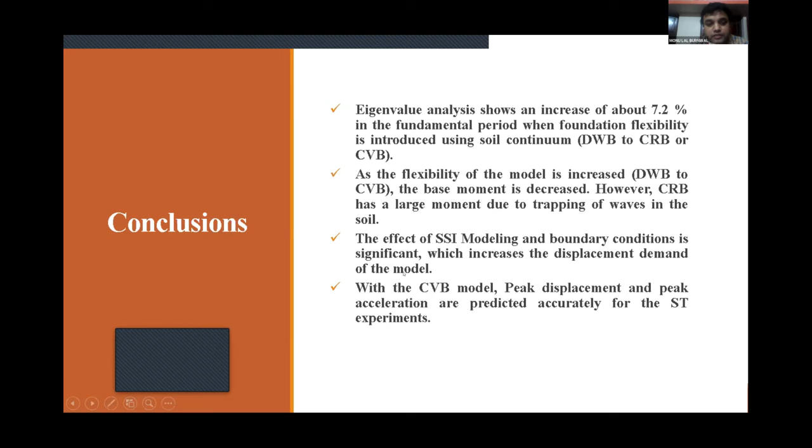The effect of SSI modeling and boundary conditions is significant, which increases the displacement demand of the model. With the CVB model, the peak displacement and peak acceleration are predicted accurately for the shake table experiment, so it was better to predict the shake table experiment with the viscous dashpot model.

Good evening everyone. I am Jagriti Mandal, and I'll be presenting my paper titled Numerical Simulation of Soil Tunnel Interaction Under Surface Blast Loading. The main focus of my research work at this moment is to simulate the contact between the geomaterial and the underground structure, that is, the tunnel.

The problem is that modeling this interface is quite complicated because of all the complexity involved in it. There's relative translation, then relative rotation of the surfaces in contact. Along with that, we have to maintain the load transfer from either soil to structure or structure to soil, depending on the loading condition.

When the shear stress exceeds the maximum shear capacity of the interface, the bond strength starts degrading, marking the bond failure stage, where friction at the interface starts contributing to the process. We can still see some residual bond strength here, but as damage increases at the interface, it gradually diminishes to zero, marking the friction sliding stage. Herein, the shear stress is completely due to friction, and the slip increases at a constant residual shear stress. The problem is how to numerically simulate this entire mechanism simultaneously.

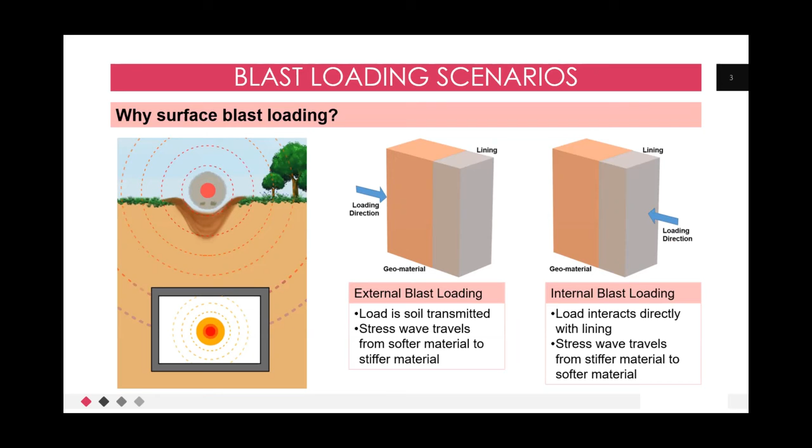Simulating this soil-structure interface, we have to take care of those three stages I discussed before, and this should happen simultaneously. Furthermore, realistic load transfer should occur between the contact. Right now we have contact methods, but they don't fulfill the entire requirements for this problem. Among these contact methods, I have used three: the shared node method, the thin layer element method, and the contact friction method.

In the shared node method, the adjacent nodes from the soil part and the structure part are merged together, assuming the contact is completely rigid between the tunnel lining and the soil. For this problem, I used LS-Dyna to simulate it, and LS-Dyna provides a keyword, Constrained Lagrangian in Solid. What it does is when we simulate the problem, we define the tunnel part using Lagrangian element formulation, and we define the soil part as ALE, Arbitrary Lagrangian Eulerian element formulation. Using this keyword, we can define the contact between these two parts.

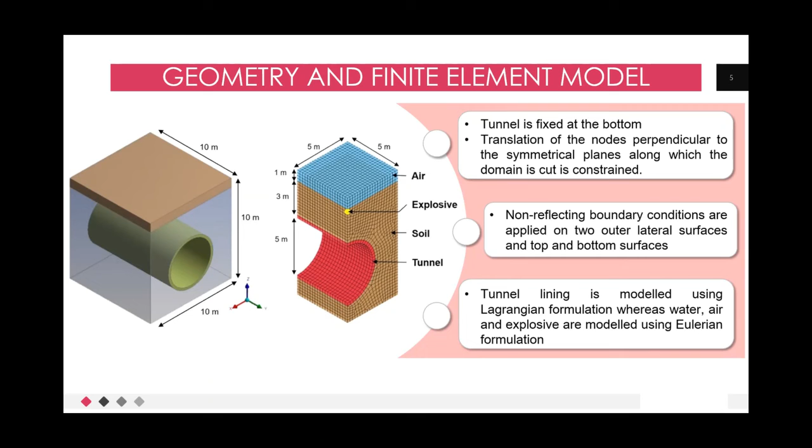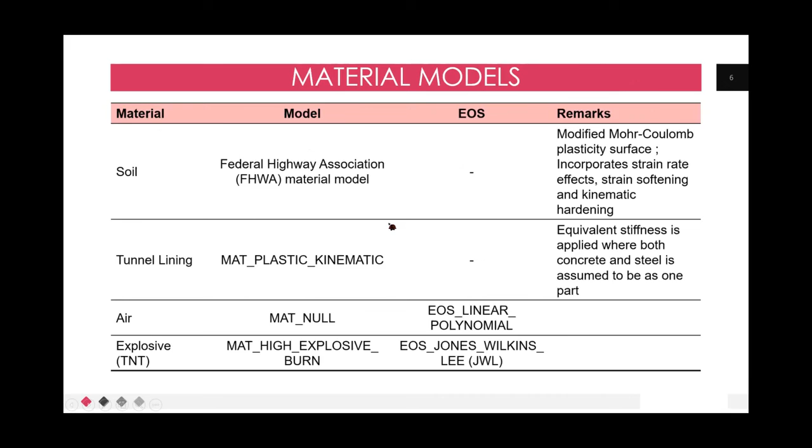So these are the material models that I've used, and I've validated the model using certain empirical formula, and the validation was quite okay. So I've proceeded with the main problem.

In the shared node method, the rebound displacement is significantly higher, and it is because we have considered the lining-interface to be rigid. That is the issue with that.

If you go for the thin layer method, this particular layer accommodates the opening and closing of the interface, and thus it acts almost flexible, so we have less rebound. But if we go to the contact friction method, it gives a displacement of 1 mm, which is quite less, and the rebound occurs way behind in time, showing that the load transfer is not happening properly. So I'll jump onto the conclusion now.

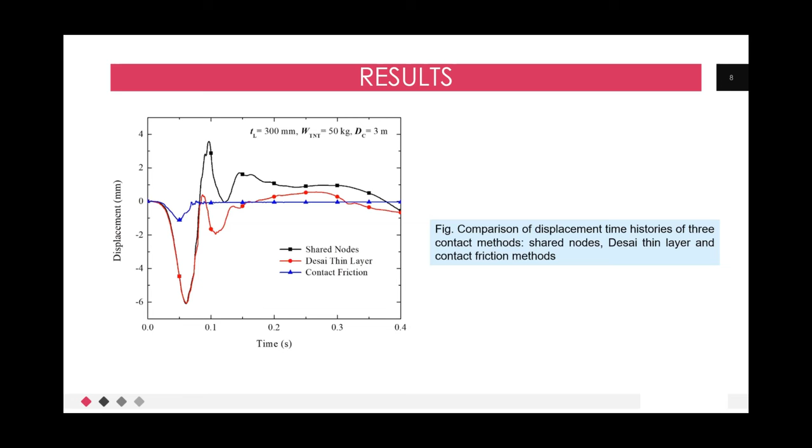We can say that the Desai thin element layer method and the shared node method simulate the interface quite better than the contact method, the Coulomb friction method. I would suggest that more investigation should be carried out to develop a numerical technique which would simulate the entire complex soil-structure interface mechanism, including the bond stage, bond failure stage, and friction sliding stage. So that would be all, thank you.